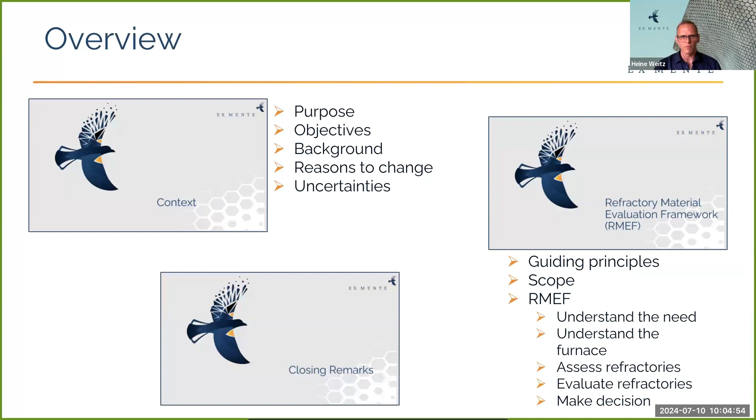And then I'll close with some key takeaways and closing remarks.

The purpose of the talk is to help support smelting operations to be profitable now and into the future. This is again a sustainability topic, with the focus here on profitability, so economic sustainability. But obviously refractory materials do have an influence on things like your thermal efficiency, so environmental sustainability is also an issue here. The focus really is to help ensure that smelting operations, when they consider new or alternative refractory materials, reduce risk as far as practically possible. We'll do that by presenting a framework for evaluating alternative refractory materials.

Just some of the objectives, what we want to achieve with this talk: we've spent quite a bit of time thinking about this, and we just want to share what we've learned so far. Even in preparing for this talk, I uncovered some new insights and thought about the sequence of how we do certain things. So it's an ongoing process, and we're still refining this. This is a platform for us to share what we've learned, and to get your feedback and your perspective. There may be some key things we are missing, and it would be wonderful to learn about that, so that as a community we can expand on this framework and all of us use it to help us be successful.

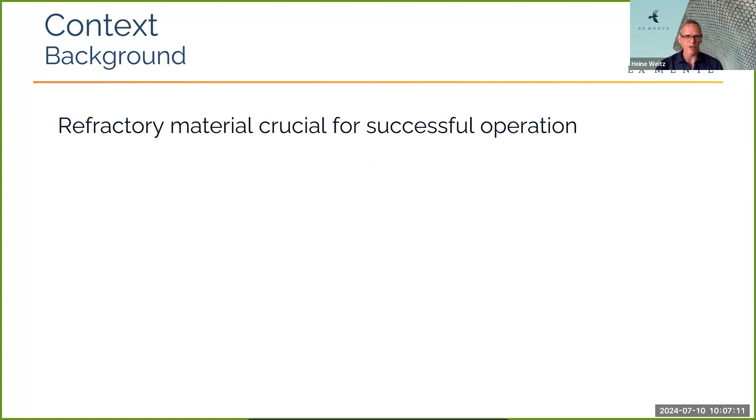Okay, just some background. I think we all know that refractory material is crucial for successful operation. I suspect no one would have joined this talk if this wasn't the case, if everyone wasn't aware of this. And we also know that the cost of failure is high.

And the first cost item that we need to consider is safety. If you have an unplanned or an unexpected failure, safety of people is of serious concern. Then also the safety of equipment and refractory cost. It's hardly ever only the refractory that fails. If you have a catastrophic failure, a lot of the surrounding equipment also gets damaged.

And then another cost item, which I suspect is actually a bigger cost item than the equipment and refractory cost, is that of lost production. Just thinking of the revenue loss if a furnace is off for 6 months, that can be quite a large amount of money, and that's a definite impact on profit.

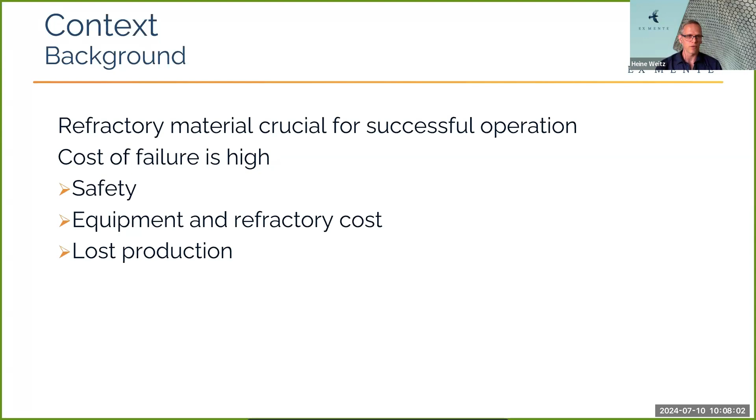So what tends to happen is people tend to stick to the familiar, keep on using the refractory material that you have been using all along. It's the lowest risk, but it does come at the expense of things like improved efficiency and refractory life. There are definitely some benefits that you can gain from looking at alternative refractories, and those opportunities are lost if you just stick to what you've always done.

But that's also not always possible. Situations change, and there are a number of things that one needs to consider. So one is sometimes forced to consider alternative refractory materials. And in the next few slides, I'm just going to talk about some of these aspects that we consider, or what drives people to change and to consider alternative refractory materials.

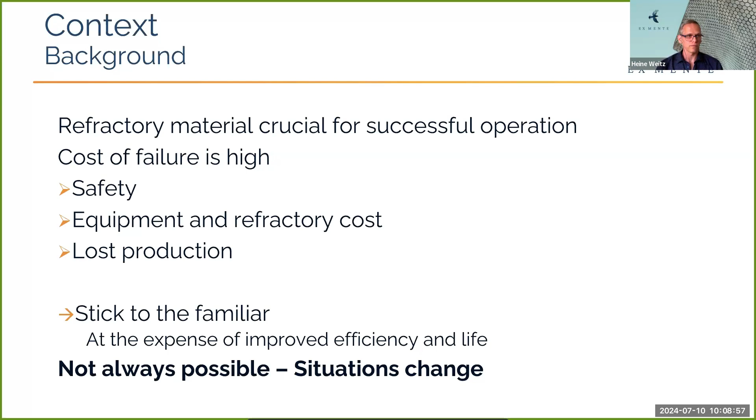Okay, so the first one I think is probably the most obvious one, lower cost. If you've got refractory lining of say 20-25 million rand, and you've got an opportunity to buy a lining for a few million rand cheaper, that's obviously a good motivation. We know that manufacturing costs in Europe are higher than in South Africa, which in turn is higher than in Asia. So manufacturing cost comes into it,

but then also the transport cost. It takes effort to get refractory materials from Asia and from Europe into South Africa, a lot more than by using a local supplier.

Second one involves reliability of supply. One seriously wants to avoid interruptions in your smelting operations. And the more popular refractory suppliers tend to have a longer pipeline of orders. So if you order a refractory material now from a prominent refractory supplier, it can take a while to get the material on site, especially if you include transport time as well.

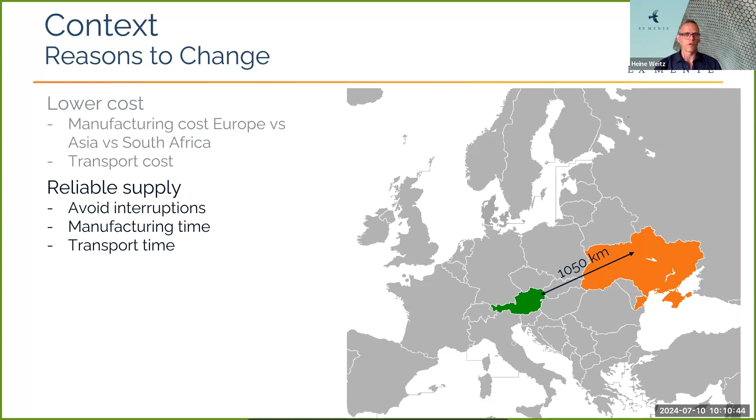And on the picture there, I think we can't ignore the fact that Austria, for example, is close to a conflict zone. That distance there is basically the distance from Bloemfontein to Cape Town. So one cannot ignore that. Don't get me wrong, I'm not trying to dissuade people from using European suppliers, but I think it is something that we need to consider, because we can't just look at the technical aspects of refractory materials. We need to think about political issues that affected it as well.

Okay, then improved refractory life. So if you have less frequent stoppages, the capital investment that you need also becomes less frequent. And similarly, the long stoppages become less frequent if your refractory life lasts longer. I think everyone would like to have at least a couple of years of longer refractory life. It just improves your utilization and your cash flow.

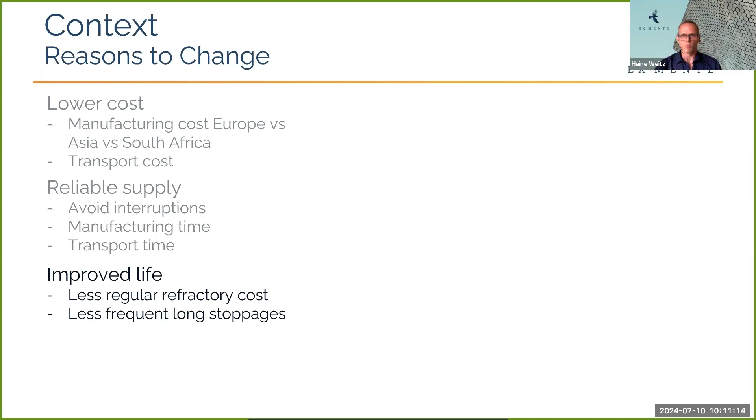And then the last one I've listed, and there are probably a lot more to think about, but these are really the ones that in our discussions with producers, these are the topics that have come up and what's driving change. So the last one is energy efficiency. If we have, for example, a 30 megawatt furnace with a utilization factor of 85%, and you are able to increase its thermal efficiency from 85 to 87%, you can save along the lines of 7 million rand per year.

But not only that, that's one perspective, the energy saving, but you can also use that energy to increase your throughput. So that might be even more depending on the commodity that you work with. So there's a big opportunity to improve your design by improving your refractory lining's thermal efficiency.

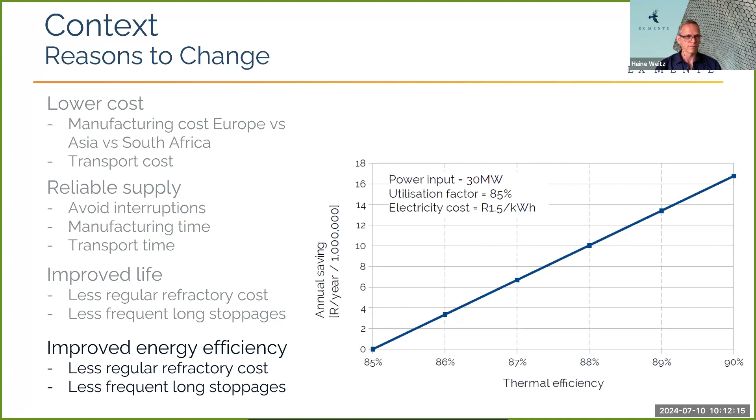Okay, but that doesn't just come for free. There are a number of uncertainties, and we've grouped them into two groupings. I'm not going to discuss each of them in detail, but it's just to make you aware of the things that we don't know when we start looking at alternative refractory materials.

So the first group is the performance uncertainties. The refractory material itself, when you heat it up and put it under the conditions it needs to be at during operation, will it be able to withstand those conditions? Then the resistance to thermostructural forces.

As the refractories expand, you have compressive forces which the refractory needs to withstand, and also things like thermal cycling. Certain refractories are more prone to spalling than others, so it's an uncertainty we need to consider. When you look at a new material, how is it going to perform in comparison with the material you've currently got?

Then compatibility between refractories and process materials. That's not always necessary, depending on your containment concept, but it's something one needs to know that you don't know at the start when you look at new refractory materials. Similarly, the ability to support the slag freeze lining.

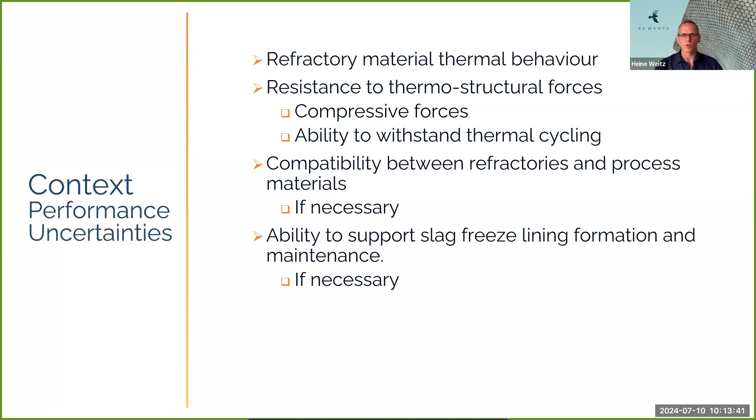So all sorts of different freeze linings. People speak about conductive and insulating freeze linings, which might be somewhat relative, but it's important to understand with the conditions that the refractory material will be exposed to and the material properties, both of the process material and the refractory materials, whether you'll be able to establish and sustain the slag freeze lining.

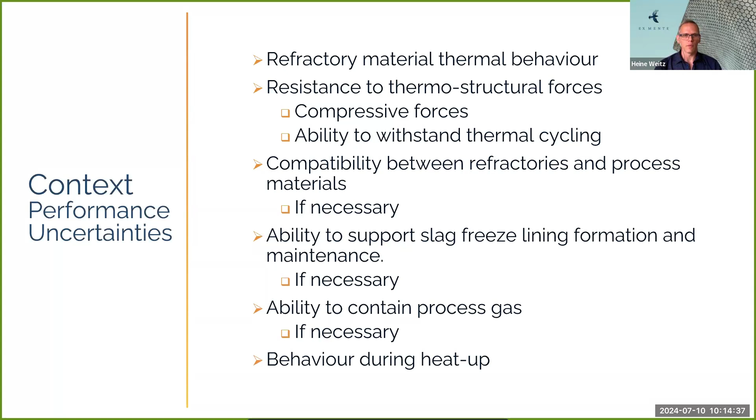And then the ability to contain process gas, especially if you're working with sulfur-bearing materials, containing sulfur dioxide gas is sometimes a requirement. And then behavior during heat up. The refractory material undergoes changes as you heat up a furnace, so it's important to understand how well it will perform during heat up and commissioning.

Now, the second group of uncertainties are the material physical properties. Here I'm not going to discuss each of them, but we've got a number of uncertainties related to the refractory material, things like thermal conductivity and resistance to thermal shock.

Slag material properties, I think that's a big topic of discussion. In the last conferences we've attended, we've noticed that people are paying attention to this, but there's a lot we still need to know regarding slag material properties, things like thermal expansion and density changes. And then feed materials as well, because the refractory materials are also in contact with solid feed material in many cases.

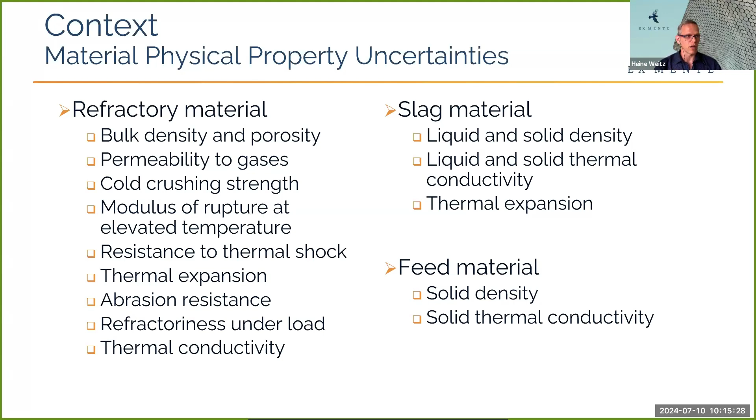Okay, so now going into the refractory material evaluation framework. Before I start, I just want to give some guiding principles. Those of you who attended the Pyrometallurgical conference earlier in the year would have seen some of these principles in Johan Zietsman's presentation, but a number of them are applicable to refractory materials as well. I'm going to step through them to make sure that we don't have unrealistic expectations of what we actually can achieve.

Okay, the first one is that perfection is a myth. You won't remove all the uncertainty. I've listed a whole number of uncertainties, and you're not going to get rid of all that uncertainty. But the idea is to remove enough uncertainty that you can proceed with confidence and know that you've done your part to make a good decision.

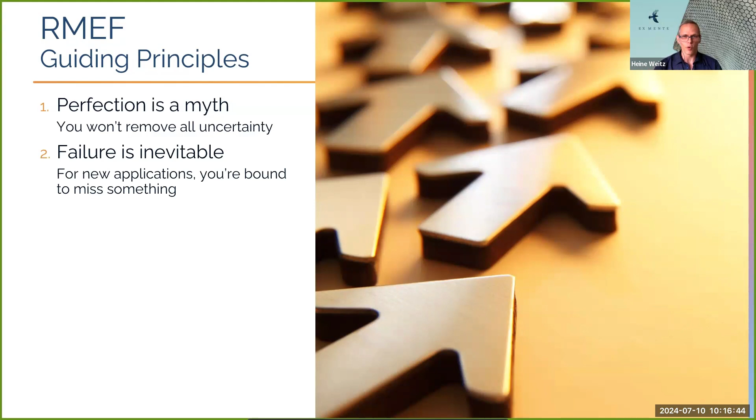Then failure is inevitable. If you're trying something new, you're bound to miss something important. But the point is to fail quickly and cheaply. We've got a whole host of tools and methods that we can use to fail quickly. We want to eliminate infeasible options as quickly as possible at the lowest cost, whether that be with a laboratory test or with a computational model. We need to make sure that we don't expend a lot of time, effort and money to investigate an option that could have been eliminated with very simple calculations.

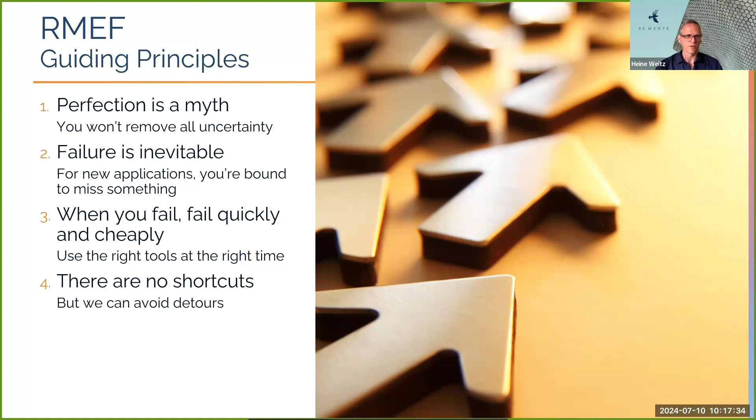Okay, then there are no shortcuts. There is a fair bit of groundwork that one needs to do when you look at alternative refractory materials. But we can avoid detours. We don't need to do a complete battery of tests on every single refractory material we consider. We can use simple tests to eliminate infeasible options quickly.

And then lastly, we need to look at the entire life cycle. So it's not just about normal operation. We need to think about commissioning, startup, heat up, and shutdowns.

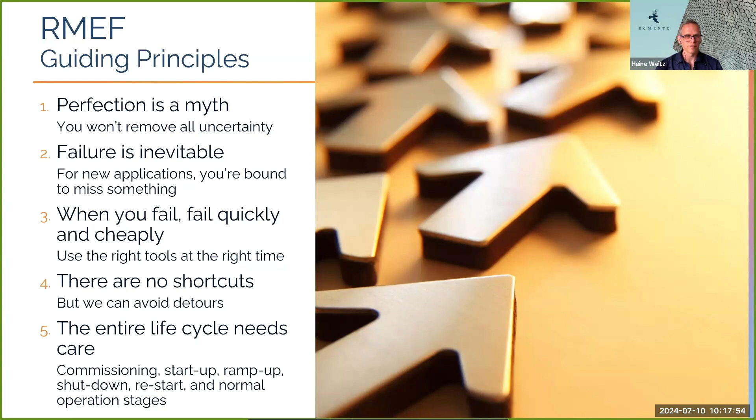Okay, so in terms of the scope of this talk, we are only looking at smelting furnaces in this case. It doesn't mean that the remainder of the talk is not applicable to other reactors, but just bear in mind that when I say something, that is my reference.

So just something to keep in mind. And we're only looking at refractory bricks. Again, a lot of what we'll address is important for things like monolithic materials, but our focus now is just on refractory bricks.

And then lastly, we're only looking at the technical aspect. At the end of the day, to make a decision on switching to a new refractory material, there are lots of commercial and other risk factors to consider. But we are only looking at the technical aspects. I think that's where a large part of the uncertainty lies. So that's really the focus of what we're talking about today.

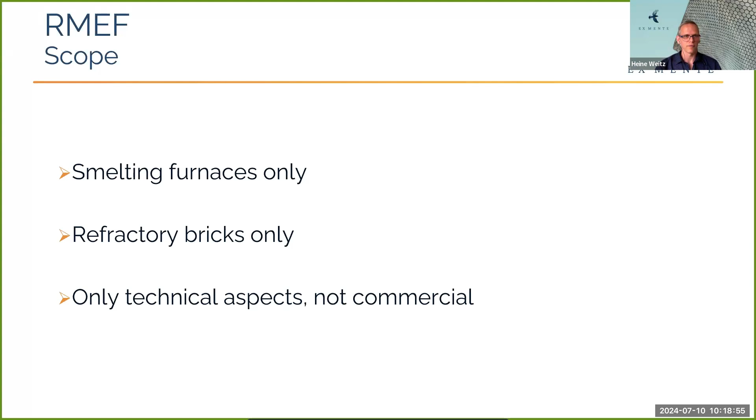Okay, so a brief overview of the refractory material evaluation framework. The idea is to start doing the high-level thinking and then gradually increase the level of detail that you consider in order to enable you to make a decision ultimately.

So we start off by understanding the need. We need to know what the requirements from the refractories are. What do you need it to do?

Then we go a bit deeper and we start looking at the furnace itself, where the refractory materials will be used, looking at the materials, the equipment, the process, and the containment strategy.

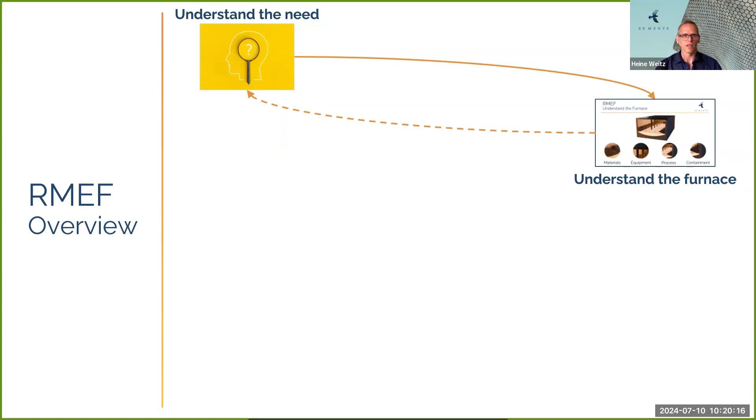Now, as you investigate the furnace, you might find that some of your initial requirements that you identified may be incorrect or unnecessary. Just thinking, for example, about if you identify a requirement for the refractory material to be compatible with your slag, but you have a process that you are able to sustain the freeze lining, then that requirement is not necessary. So one needs to review the requirements regularly and make sure that they are realistic and help guide you in your decision making.

So once you understand the furnace, you can start assessing the refractory materials. So this involves a number of physical and computational tests. So there are a number that we will address.

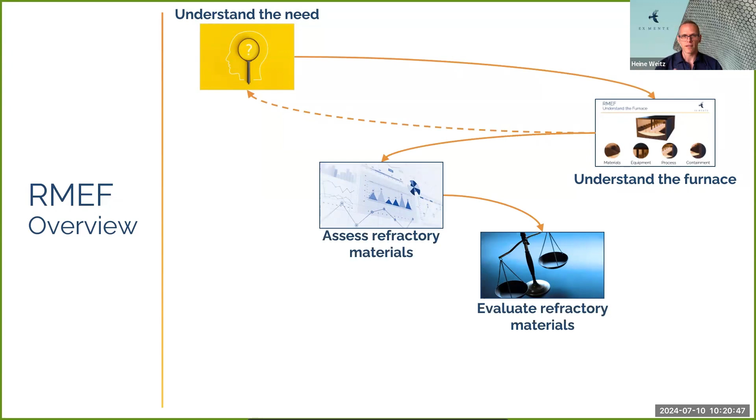And once you've done that, you can actually evaluate the refractory materials. That involves taking the assessment results and comparing that with your requirements to see, does it actually meet the requirement? And then ultimately, you can act on that. Once you've got the information, you can make a decision and approve it.

Okay, so we're going to start by looking at understanding the need for the refractory materials. To do this, we'll tap into systems engineering. We never did this in our undergraduate studies. So I'm just going to give some background information on systems engineering.

Forgive me if this is something that everyone is familiar with, but I think it's important just to say something about systems engineering. Now, the systems engineering body of knowledge describes it as an interdisciplinary approach and means to enable the realization of successful systems. So that's quite a mouthful. But it's an approach followed by a number of big companies like Boeing, Google, NASA, and the like. And really, it's a means of helping us to deal with complexity.

Now, this is a fairly rich field. I think the body of knowledge is a document of about 3,300 pages with lots of interesting methods and techniques. And we don't have to go into the detail of all of that. The systems we work with are complex, but we're not designing an aircraft. So we only need to use those tools that really help us.

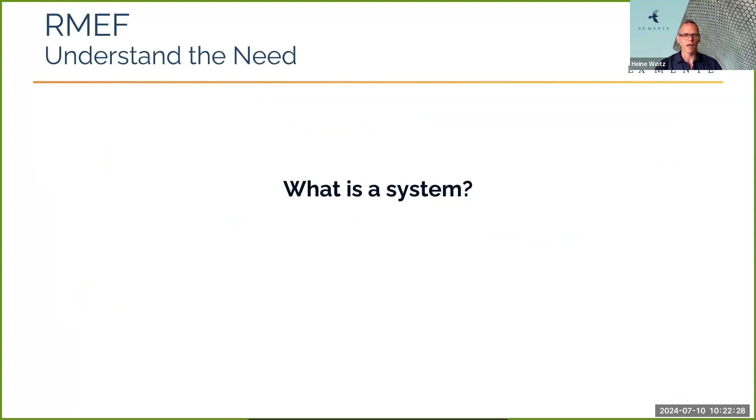Okay, so let's just step back and think, okay, what is a system? Now, the definition of a system is a set of interrelated components or elements that work together to achieve a common goal or purpose. So it's basically something that can do something on its own, to put it simply.

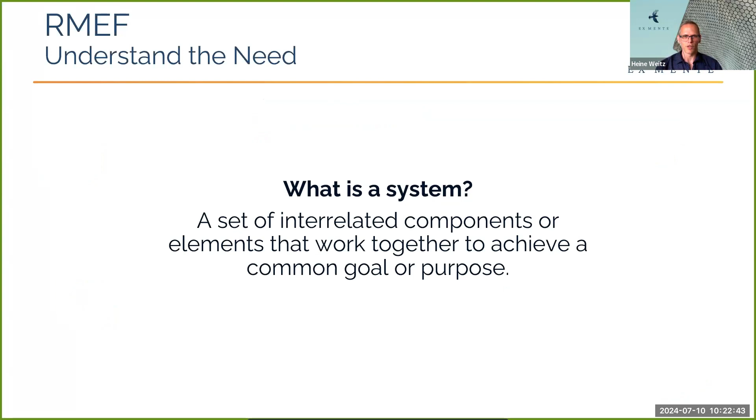Okay, so the two tools from systems engineering that we rely on, the first one is the physical hierarchy. So that's identifying all the system elements and seeing how they fit together, how they support one another. And this is really a means of identifying all the moving parts in your system to make sure that you don't miss anything important.

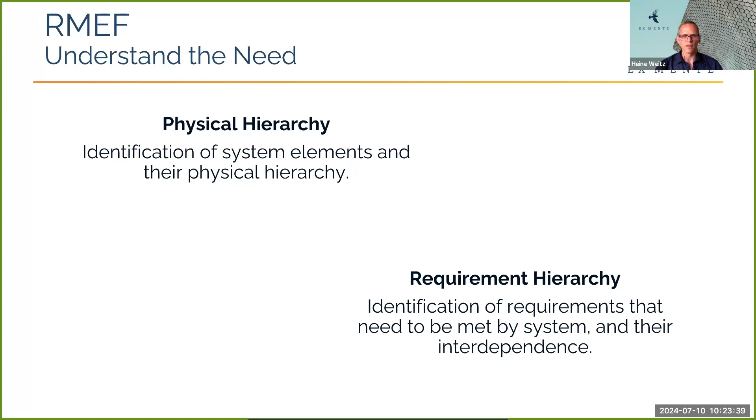And the second tool is the requirement hierarchy, or maybe call it a functional hierarchy. So each component in your system or each system element has certain requirements associated with it. And these requirements also form a hierarchy with certain parent and child connections. So that's the idea with the requirement analysis, is to identify that requirement hierarchy to make sure that we address each of those requirements.

Okay, so we'll start looking at the physical hierarchy. So what we do with this is to take a furnace, for example, and break it down into all its individual system elements. Then we can start thinking about each element individually and make sure to systematically step through that and that we don't miss anything important, or at least limit the likelihood of missing something important.

So we'll start from the highest level, which is a system of systems. And we can consider a smelter site to be a system of systems. It contains a number of systems, such as the smelting furnace, but also others like a rotary kiln and a batching plant. And a laboratory is also considered to be a system. I'm going to expand now on the smelting furnace only, because that's where the refractory materials are located. So I'm going to unpack this gradually.

So each system can be made up of a number of subsystems. So for a smelting furnace, that could be the furnace vessel, but also the feed system, electrical system, electrodes. And there are a number of subsystems that make up the smelting furnace. Okay, the level below that we refer to as assemblies. So a furnace vessel, we have different assemblies. So the hearth, the tapholes, the different levels on the sidewall, and freeboard and the roof, they are all

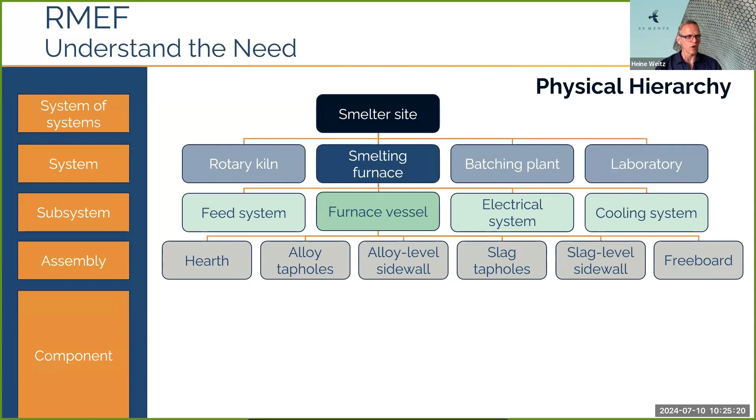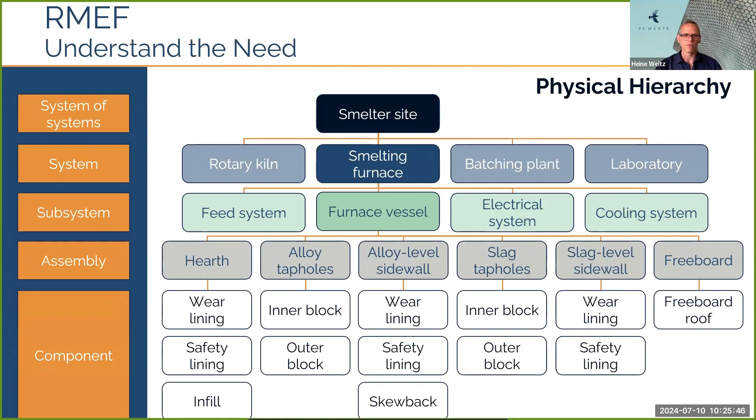considered to be assemblies. And then at the lowest level, we've got our components. So each assembly is again made up of a number of components. Just looking at the hearth, we've got a wear lining and a safety lining and infill material. So the idea with the physical hierarchy is to step through the equipment that is physically present on site and identify each different part so that we can think about them on their own.

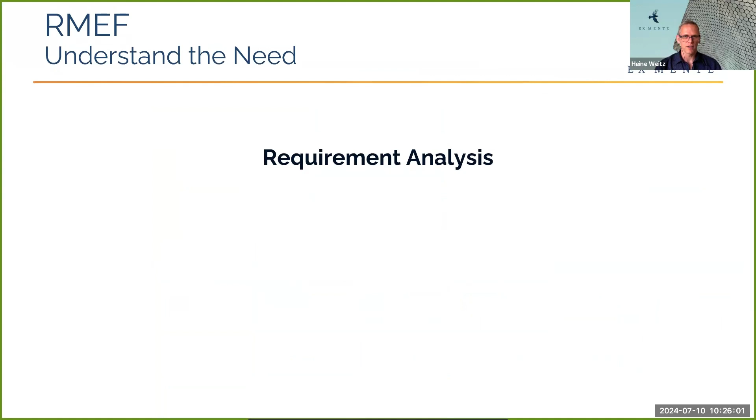Okay, so next we're moving to the second tool from systems engineering that we use, which is requirement analysis or the requirement hierarchy. And again, it's to start with the high-level thinking. I think this is something that's fairly simple to do, a requirement analysis. And I think because it's so simple, people tend not to do it. It doesn't feel like hard work. As engineers, we tend to dive into the how before we properly think about the why and what. So this is just a reminder, an encouragement to rather look at requirements before starting with detailed calculations and modeling.

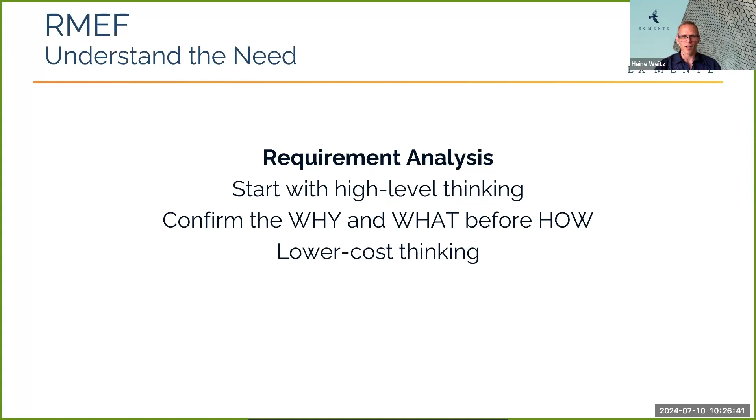This is very low cost thinking, so it doesn't involve lots of modeling time and analysis. It's really a very simple means of identifying what the system needs to do. And again, it's to help us make sense of complex systems. And the format we typically do this in is just a work session, just sitting around the table and having the team think about what is required of each system element and the system as a whole, to make sure that we set realistic requirements that we can use to evaluate the refractory material in this case.

Okay, so requirements are classified in a number of ways. I'll just show three common ones that we use. Now, classifying your requirements is not necessarily an objective, but we do like to think about the different types of requirements because that guides you into identifying them. So the first one we think about are the functional requirements. And the leading question there is, what must it do? So what must this system element do? Or what must the system do? This would be something like the furnace needs to produce X tons of ferrochrome a year.

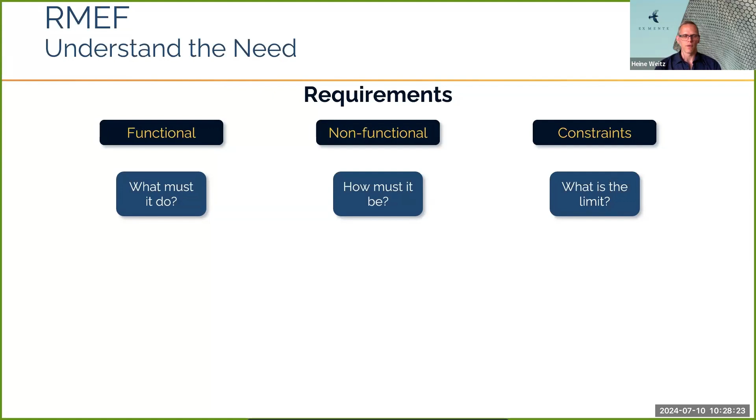The second set of requirements are the non-functional requirements. So how must it be? So the furnace must be efficient, or it must be maintainable. And the last one is the constraints. So what is the limit? What can you not do with this system element? Or yes, what are you prevented from doing with the system element?

Now we use four statements to think about requirements or to describe our requirements. The first one is obviously the requirement statement itself. So what is the requirement? The second one is the rationale statement. Why is this a requirement? One tends to identify requirements without always thinking about why you need it. And then we've got the performance statement. So what is it that you're going to target? And here it's important to actually quantify your performance statement as far as possible.

If you're not able to quantify your performance statement, it can be an indication that it is not actually a necessary requirement. So it's important to think about how will I quantify it, because if you can't quantify it, there's no way of checking if you actually meet the requirement. And the last one is the verification statement. How will you measure your performance?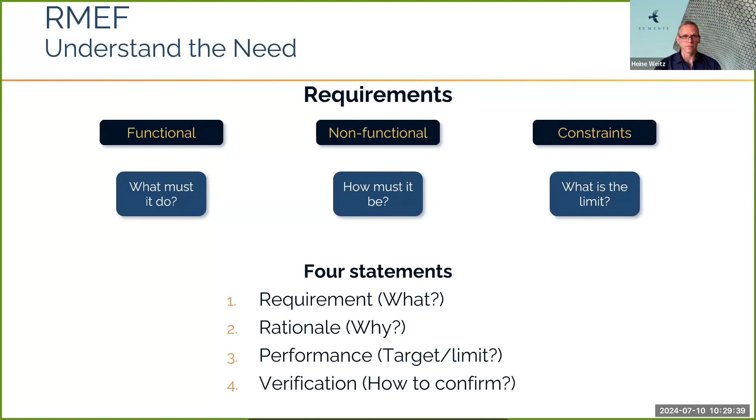Now, just a couple of examples here. So you can see right at the top line says that's the requirement statement. So in this case, thermal losses from the hearth must be kept low. And the rationale for having this requirement is that losses reduce efficiency and ultimately production.

You'll notice here that the performance statement, I haven't actually put a number next to it. The reason for that is that at this point, we weren't able to quantify this value. This doesn't mean that you should throw away the requirement immediately, but it does serve as a placeholder. But eventually, before you make a decision on switching to a new refractory material, your performance statements need to be quantified.

Right at the bottom, we have a simple diagram. If we string all the requirements together, linking all the parent requirements to the children requirements, we end up with quite a massive diagram. So when we document our requirements, we tend to limit each requirement just to its direct parents

and its direct children. So in this case, for instance, the requirement with the dark border, limiting hearth thermal losses, that is a child requirement of the requirement to be efficient. So it just helps us to think about where the requirement fits into the whole requirement hierarchy.

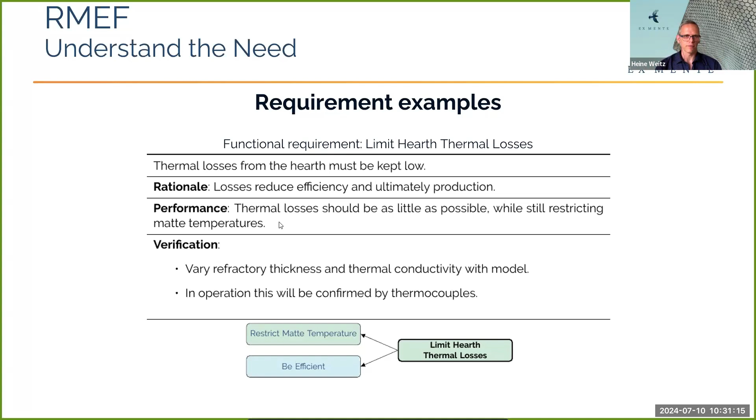Okay, so now we've gone through understanding the needs. The next one we'll look at is understanding the furnace. And there are 4 parts that we look at, or focus areas, when we try to understand the furnace. First one is the materials. There are a number of materials in a furnace, from raw materials to product materials and everything in between. And there are a number of process materials that can also be present. And it's important to identify them and understand them because they do have an effect on your refractory materials.

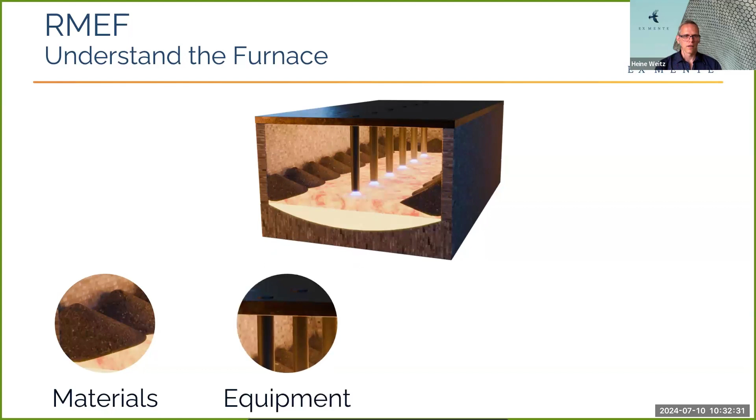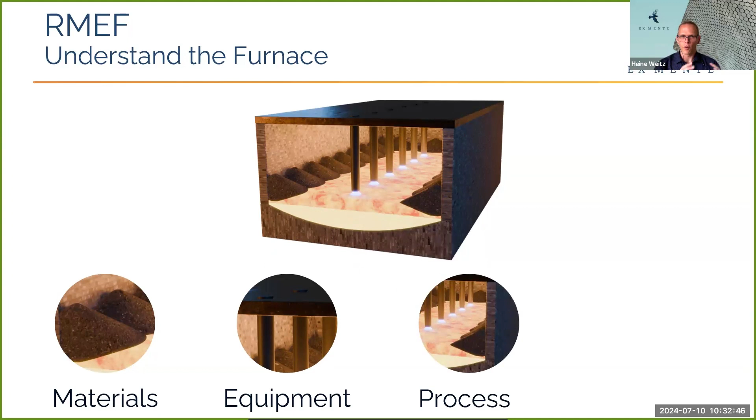Second one is the equipment itself, the equipment that you have available, and what you can and cannot do with your equipment affects your refractory materials. Then we look at the process, how you get from your feed materials to your products. And the last one is the containment concept, which is quite important to be aware of when you think about your refractory material.

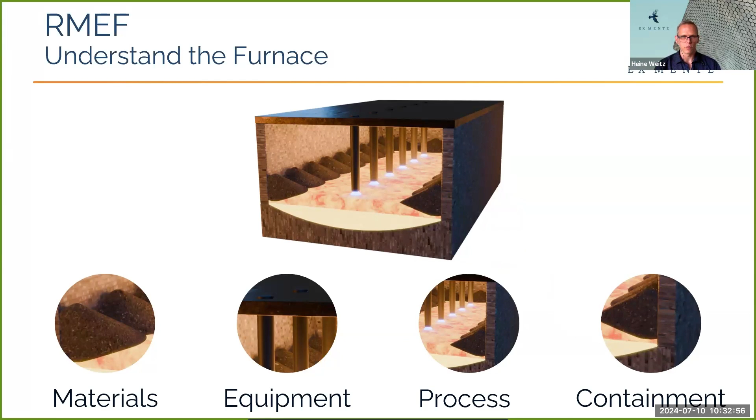Okay, starting with the materials, we look at the raw materials, where they come from, what compositions they have, the typical compositions, and how variable they are. That is important to know because your refractory materials will be exposed to these materials. So understanding the ranges within which it can vary is quite important. And something we also look at is the phase behavior.

Something like thermochemical calculations is quite a useful way of looking at raw materials. Simply taking the raw material assays and studying how the phase behavior changes as a function of temperature can give us wonderful insight to show us what material your refractory material will be in contact with.

And similarly, we do the same things for the products, looking at the typical composition and the variability within the products and how those products change as a function of temperature. One tends to sometimes think about the product materials at the temperature where they are tapped, but the temperature in the center of the furnace is different from the temperature right next to your refractory material. So the composition of the product materials will be different at that point.

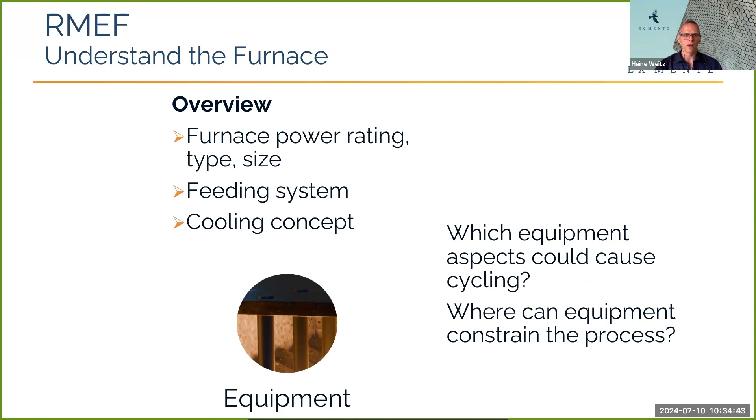Okay, then looking at the equipment, the idea here is not to go into detailed design, but rather to identify those aspects that will have an influence on your refractory material. So how could your equipment cause things like cycling? If you think about the Soderberg electrodes, that's essentially a process within a process that places certain constraints on your operation, and that might cause you to run into issues with cycling of your refractory materials if you've got electrode breaks. So those are really the aspects that we are looking at, to try and figure out how your equipment will affect your process.

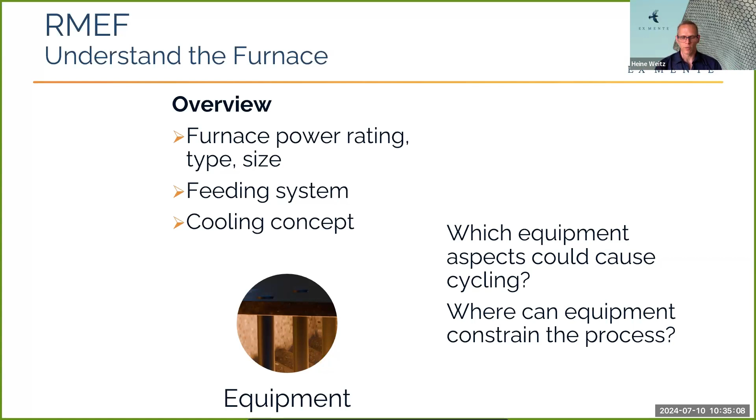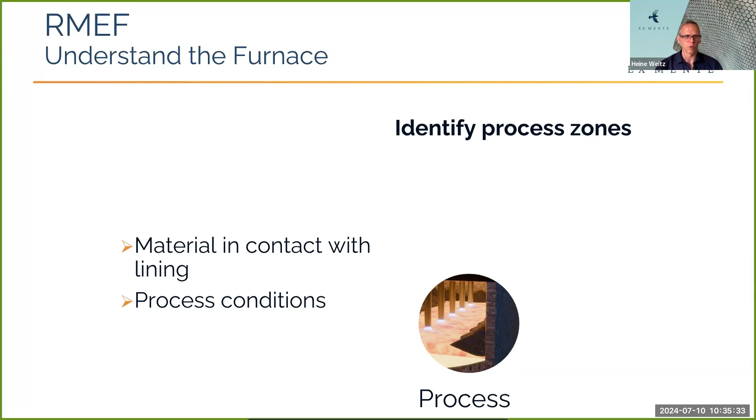Okay, so when we look at the process itself, it's important to identify the different process zones and see what material is in contact with your refractory material at different points in the furnace. You've got different process conditions at different positions in the furnace. So it's important to understand what the local conditions are that your refractory material will be exposed to. And to a large extent, that is in comparison to your existing lining material. So it's important to understand how a new material would perform in relation to what you've currently got.

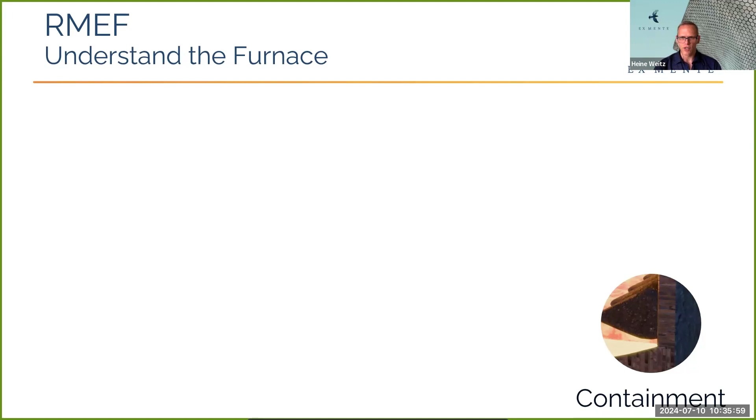Okay. Then the last component of understanding the furnace is containment. Now there are three containment strategies that at least we are aware of. The first one is that of sidewall feed heaps. By feeding large amounts of material close to the sidewall, it serves as a heat sink, and that helps to limit contact between very high temperature slag or matte and your refractory material.

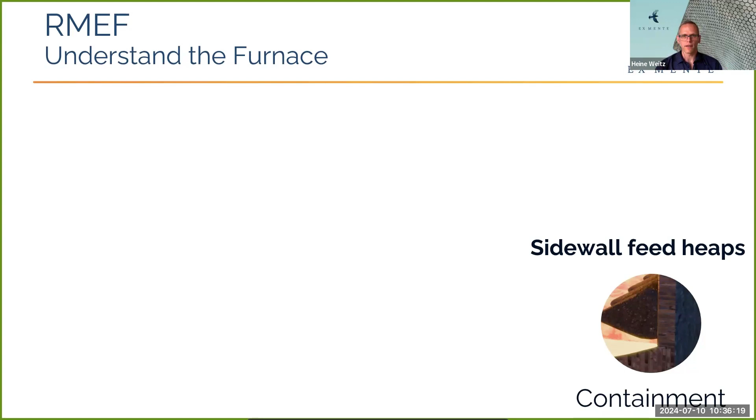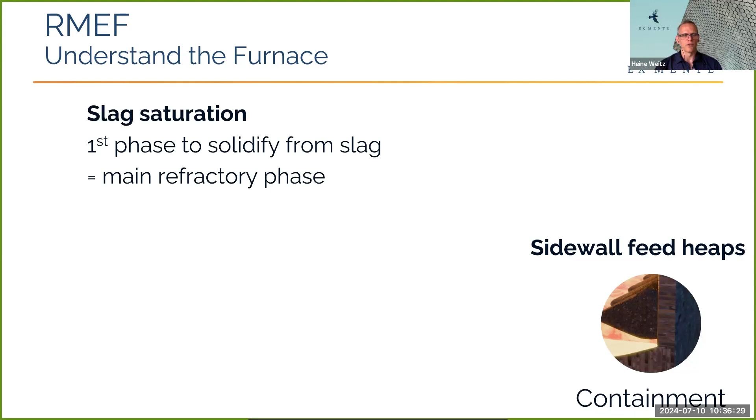Okay. The second containment concept is that of slag saturation. So the idea here is to make sure or to see if your slag is saturated in the primary phase of your refractory material. This is practically what that means. We would take a slag composition and perform thermochemistry calculations, equilibrium calculations on that over a range of temperatures. And we look at the first phase to precipitate upon cooling.

If, for example, your first phase to precipitate is periclase and you've got a magnesia-based refractory, the likelihood of that refractory material dissolving into the slag is much lower than if you have, for example, an alumina-based refractory material. So that is one strategy to contain the process.

Okay, then the last one is to have a slag freeze lining. So by carefully controlling your mass and energy balance, you may be able to form and to sustain a freeze lining that forms a barrier between your refractory material and your slag. So that negates the need to have a compatible slag and refractory material to a large extent.

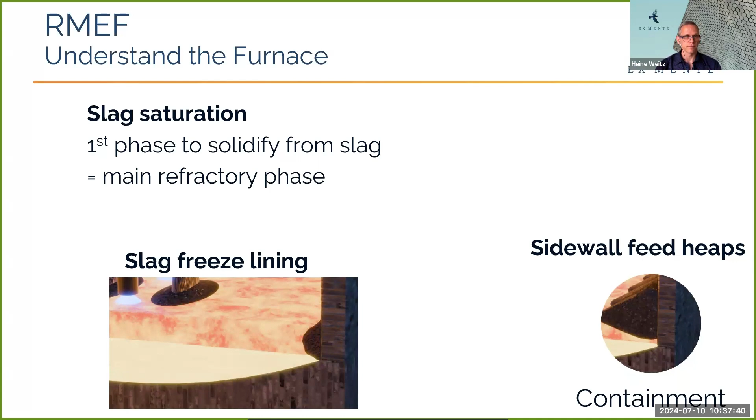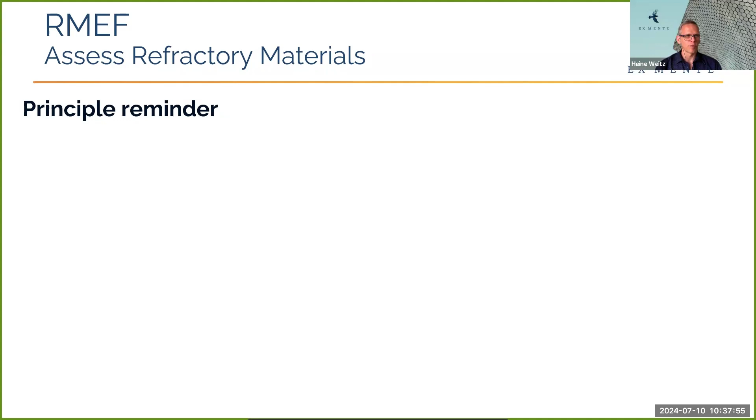Okay, so now we're going to go into the assessment of the refractory materials. There are a number of tests that we'll go into. But before I do that, I just want to remind you again of the principle, and that is to fail cheaply and quickly. So the idea with these tests is to start with the lowest possible cost test and to eliminate infeasible material options as quickly as possible.

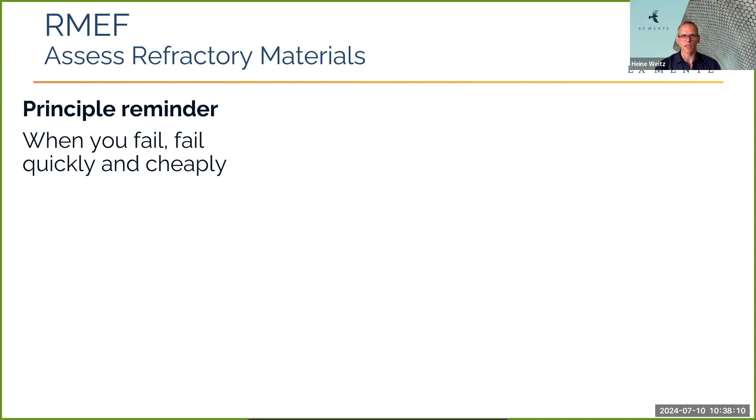Okay, so we start. The first step that we do in assessing refractory materials is to simply evaluate the supplier information. So the suppliers provide certain pieces of information with the refractory materials, and just based on that, one can often, on a qualitative basis, eliminate certain refractory materials as options. Secondly, we prepare assays for the refractory materials, and that allows us to study refractory thermal behavior. Then we need to prepare product assays. We need to understand what the products are inside the furnace.

And once we have that, we can start looking at refractory product interaction to study slag refractory compatibility, or slag freeze lining formation. That obviously depends on your containment concept. So one wouldn't look at those two aspects if you're using the other containment concept.

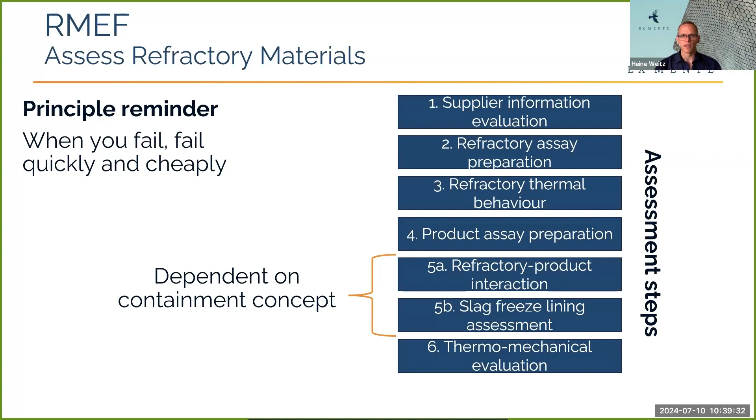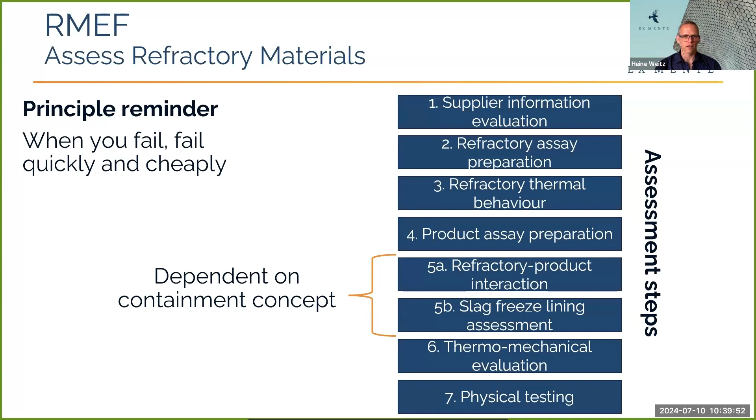The next step is then to go into thermomechanical evaluation, looking at the stresses in refractory materials and the ability of the refractory materials to withstand those stresses. And then the final one is physical testing. So that is physically recreating the conditions that the refractory material will be exposed to in operation, and evaluating the performance during those tests.

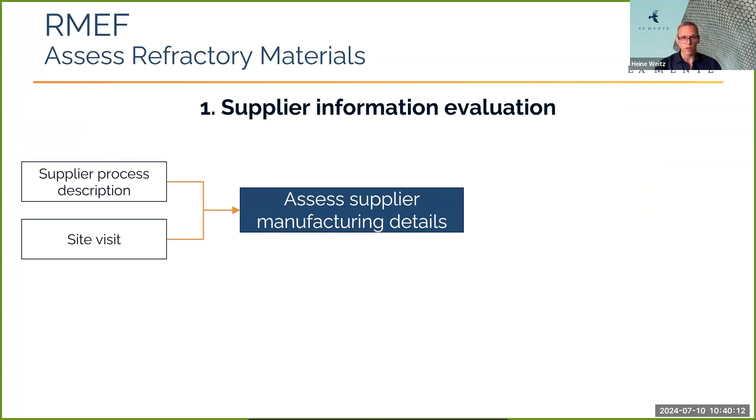Okay, so when we look at the supplier information evaluation, there are two pieces of information that we can look at to assess the supplier's manufacturing details. So you can use, for example, a process description from the supplier. Now, I realize this information may not always be available, but in a perfect world, if we do have this information available, that is an important input that you can use.

And also just simply visiting the supplier's site, seeing what they have available, how they do things, how they handle their materials, how they store it. And that ultimately gives you an appreciation for the factors that affect quality. Just visually inspecting what the supplier has and what they do on their site.

Okay, then we also need to look at the testing details. So when you receive refractory materials, you get a data sheet with test results. The question is always how reliable are those test results? So again, one can look at the test descriptions, if that's available, look at the quality standards that are being used, and also how those test results compare to comparative tests that were done, either by the refractory supplier or by doing it yourself. And again, that gives you confidence or identifies shortcomings in the test results.

So to a large extent, this is a qualitative assessment. So it's a fairly low-cost assessment, no detailed calculations that you need to perform, but it is a way of quickly identifying if a supplier will be able to provide you with refractory material that is of high quality.

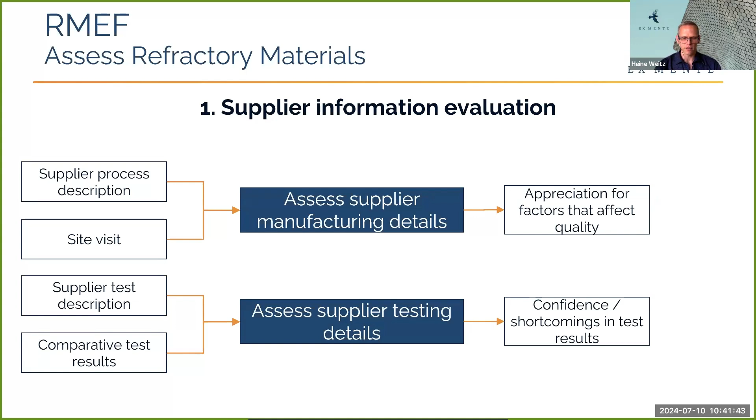Okay, then we need to go into refractory assay preparation. We start off with a refractory material chemical assay and also a mineralogical assay. Both of these are important. Typically, you only get a chemical assay from the refractory suppliers, but it's easy enough to do a mineralogical assay. Based on that, you can do an assay reconciliation to make sure that your chemical and mineralogical assay are actually in agreement, which helps you prepare the reconciled refractory assay that you will use in the next step.

One also needs to look at the refractory material microstructure, using a technique like SEM-EDS to identify what the different minerals are in your refractory material. It's not enough for the bulk material to perform well, but the individual phases also need to perform well. For example, if your matrix that holds your refractory grains together melts at low temperature, the refractory is not going to last.

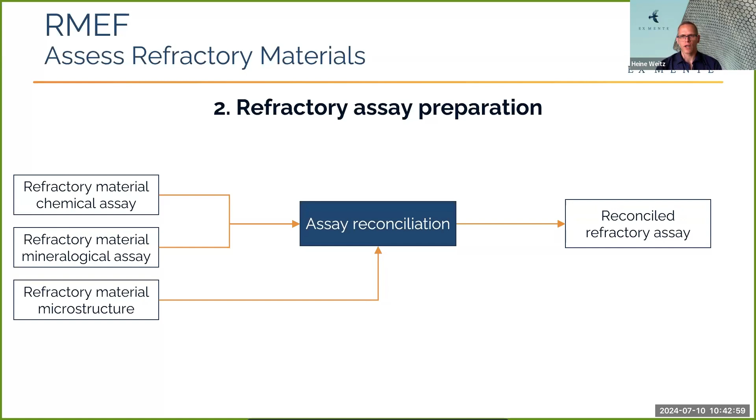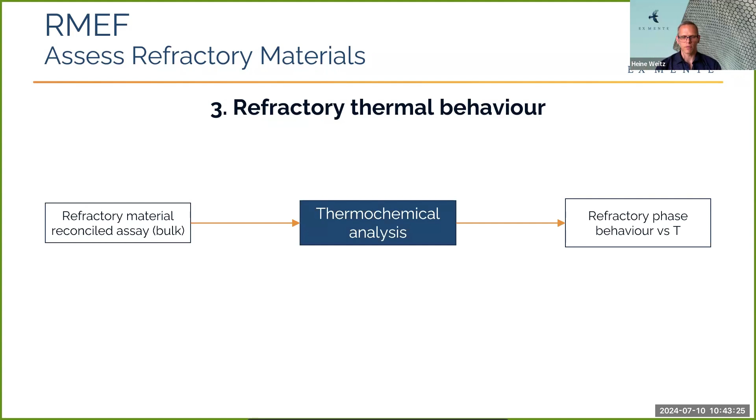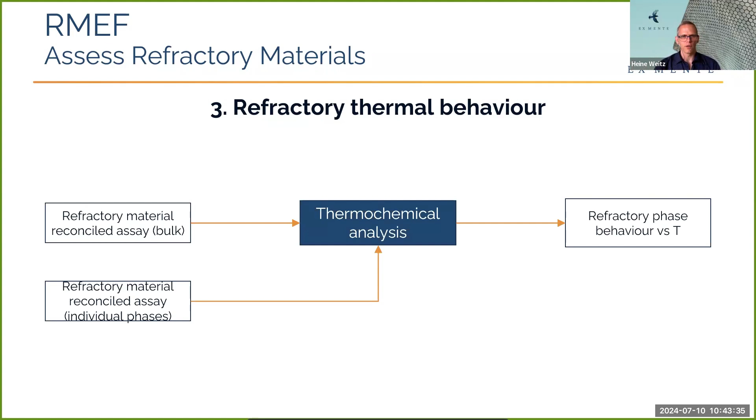So then we look at the refractory material on its own, how it behaves as a function of temperature. We start off with the refractory material reconciled assay shown on the previous slide, and on that we can perform a thermochemical analysis and simply look at how the refractory material behaves as a function of temperature - at what point will it start to melt. Again, we also need to look at the individual phases to make sure we don't have a phase in the refractory material that would melt prematurely.

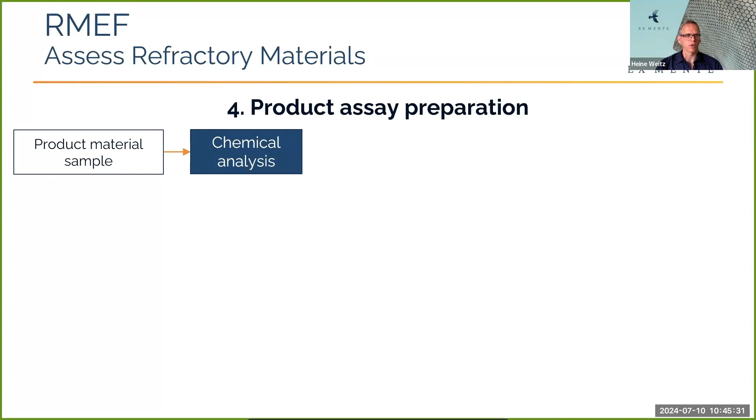I see we are running a bit short of time, so I'm going to go through the next slides fairly quickly. We then need to look at preparing product assays so we can look at how they will interact with the refractory materials. Again, we start off with a sample, do a chemical analysis, and end up with a product material assay.

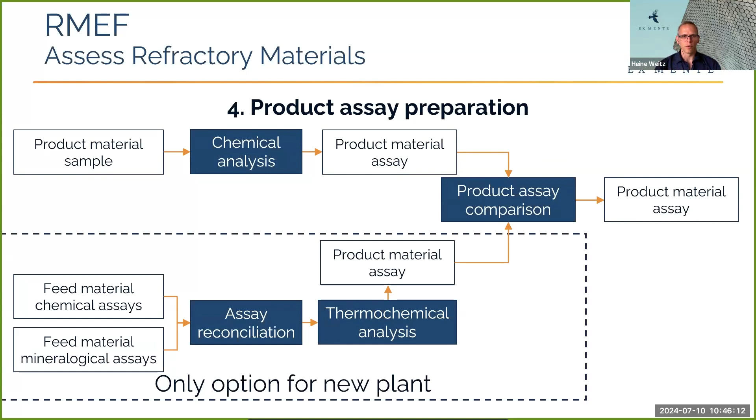Another approach is to take your feed materials, create a reconciled assay, and perform a thermochemical analysis to estimate what your product composition would be, then compare that with the actual products you get from site samples. This last approach is really the only one - if you have a new plant, this is the only approach you can follow to determine what your product material assay is, because you physically don't have product samples available.

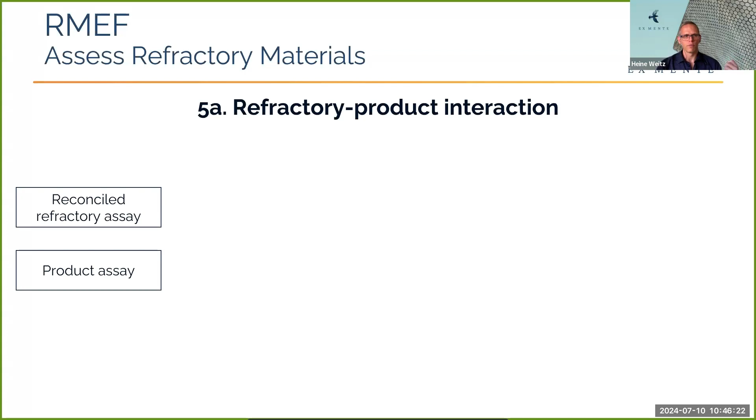Then if we look at refractory-product interaction, if we've got the product materials and we know what the refractory materials look like, we can put them in contact with one another, and with thermochemistry calculations we can look at how they are expected to interact. Now, this is not a simple matter because we're not sure how much slag would be in contact with a certain mass of refractory material.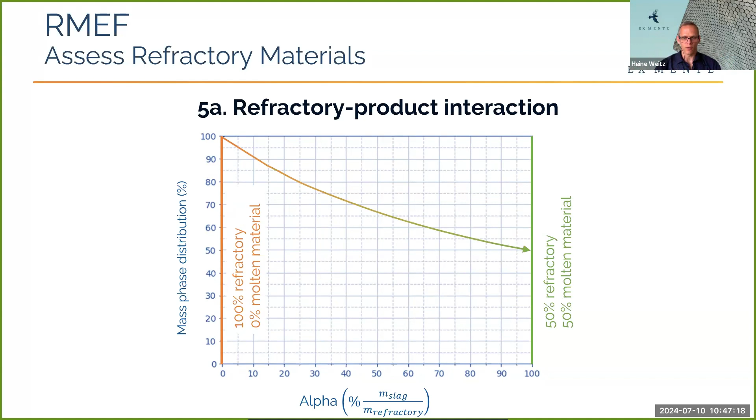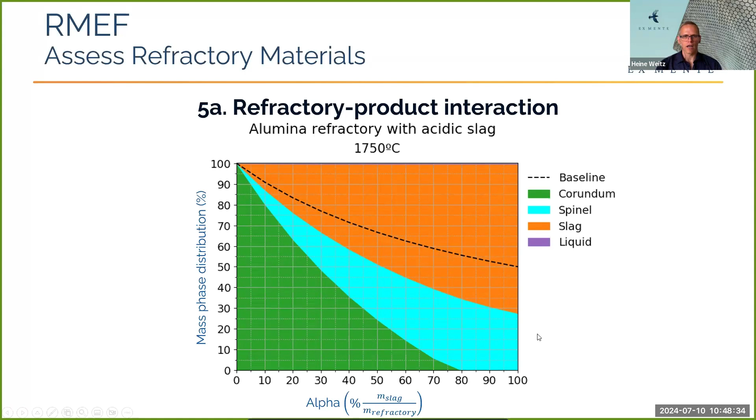Okay, then for slag freeze lining assessment, we can take a slag assay, perform a thermochemical analysis on it to understand how the slag changes as a function of temperature. And then with a simple 1D multiphysics model, we can estimate what the likelihood is of a slag freeze lining forming, and then understand what the stresses and strains are in the refractory material.

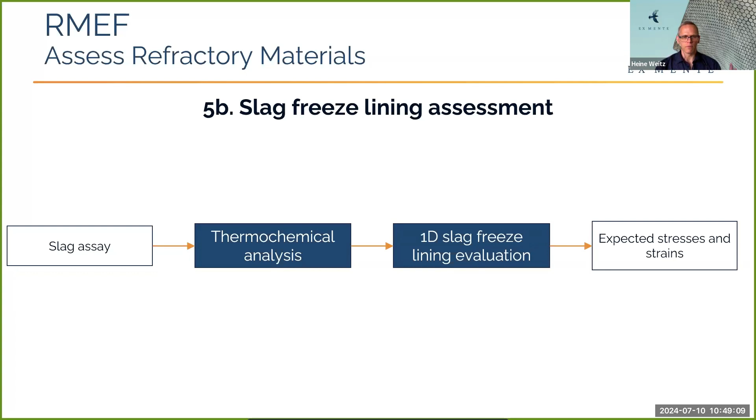Now, for the thermomechanical evaluation, again, we can take the information that we have available at the start, the refractory material physical properties that we get from the supplier, slag physical properties and alloy matte physical properties from literature, and then create a multiphysics model to describe the process.

But then you can also substantiate that by doing material property testing, taking the refractory materials and the product material samples and actually identifying or narrowing down the range of material properties to feed that into the multiphysics model again, to allow us to understand the expected stresses and strains and also the heat losses.

So with a preliminary evaluation, you look at a wide range because you've got lots of uncertainty in your material properties at the start, and identify those properties that need more attention, where you need to get more certainty and narrow the ranges to look at.

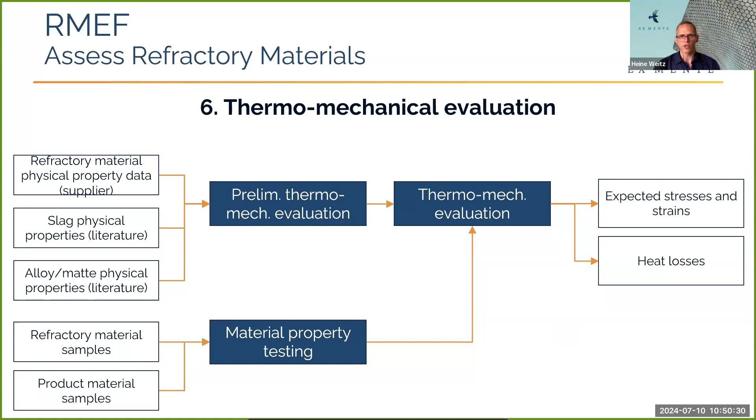And then you do material property testing only on those aspects that have a large influence on the modeling results.

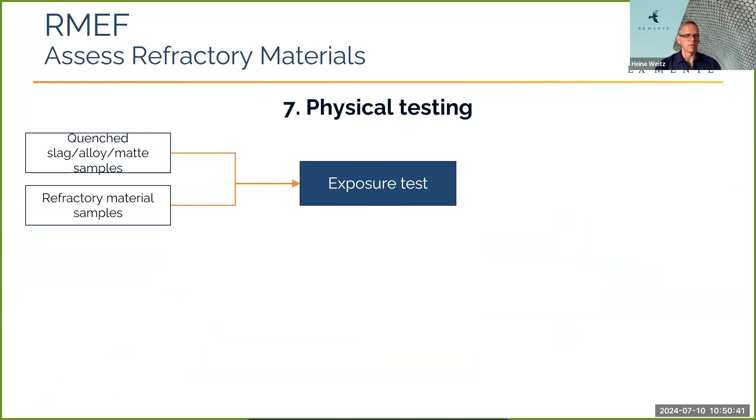Okay, and then finally, we can go to physical testing, where we take a product sample in contact with a refractory material at the conditions that you expect in the process and do an exposure test. And similarly, you can do an abrasion test, which involves higher flow velocities, and one can also do gas porosity tests, again, if that is a requirement that gas containment is required in the freeboard.

And at the end of the day, the absolute numbers are maybe less telling than the number compared to that of the existing material. So it's important to be able to look at the performance of an existing refractory material and compare that with a new material to see if the new material would outperform or underperform.

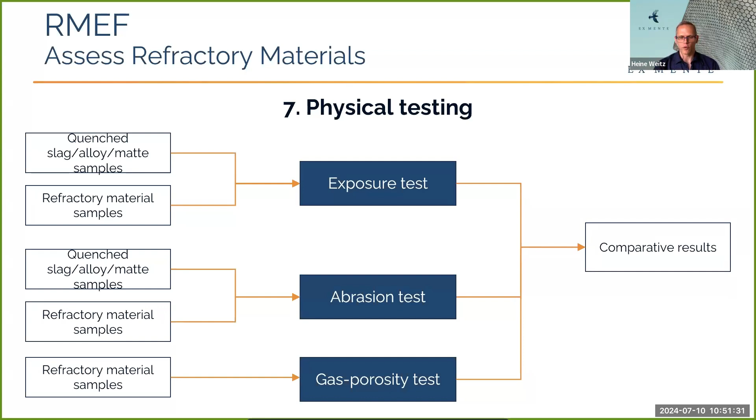Okay, we can then go into the evaluation of the refractory material. So now we will take these assessments and compare them, the results, with the requirements that we identified initially. So I've got a bit of a flow chart here.

Well, actually, firstly, before I get to the flow chart, we would look at the requirements. In this case, we would look at the requirement that the refractory material solidus temperature for the new material needs to be greater than that of the existing material. So with thermochemical calculations, we can identify what the solidus temperature is and compare that with the original refractory material.

Similarly, we can look at the heat losses. When we do a thermomechanical model, how does the heat losses compare between the old and the new refractory materials? And how does it meet the requirements?

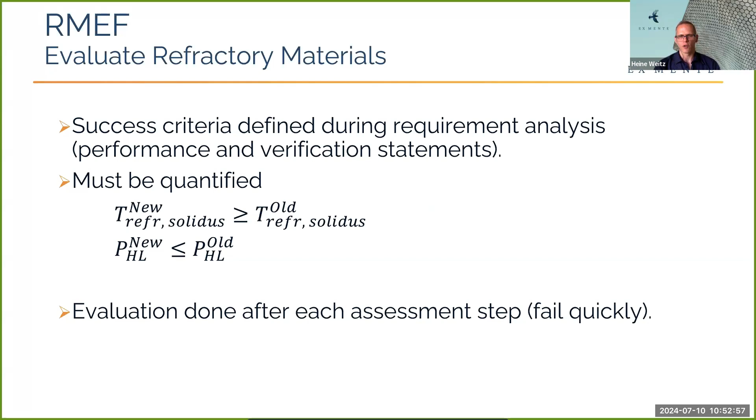And again, so we need to do the evaluation after each assessment step. So we don't do the whole battery of assessment tests before we start looking at evaluation. After each test we do, we need to evaluate it against the requirements so that we can eliminate infeasible options as quickly as possible.

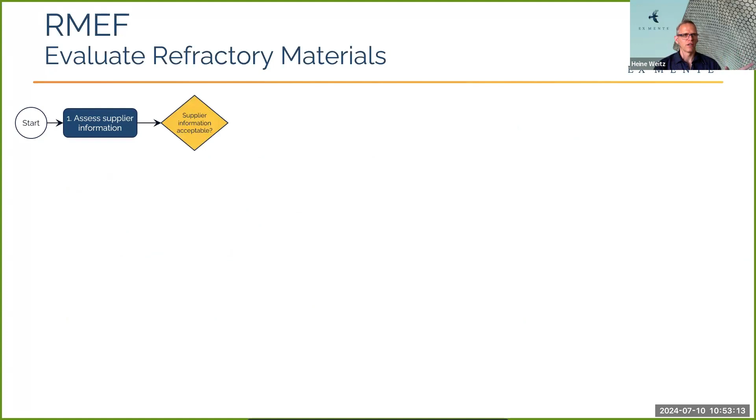Okay, so this is just a quick flow chart just to show how we step through the assessment and evaluation. So we take supplier information and evaluate that. Is the information acceptable? Does it meet all the quality standards and is all the information provided? If it's not, you can abort. And abort here doesn't mean necessarily that you completely throw out this new refractory material, but rather that you reassess and see if there's something that you've missed or another angle that you need to look at.

Okay, if the supplier information is good, you can go to refractory assay preparation, do a thermal behavior assessment, and then if again you're at a point here where you need to do an evaluation, see if the refractory material is stable at the process temperature. If it's not, again you abort, but otherwise you can go on and look at the containment strategy.

Do you require the material, the refractory and the product to be compatible? If not, do you require a freeze lining to be formed? And then you can do the appropriate test depending on what containment strategy you have. But before you can look at those assessments, you need to determine what your product assay is.

And then ultimately, evaluate performance. If you require a freeze lining, is there a likelihood of a freeze lining forming? If not, the test fails. If it is, you go on to the next step by doing a more detailed thermomechanical model and evaluating the performance. If the thermomechanical model is unsuccessful, you stop. If it's successful, you proceed to physical testing. And if physical testing is successful, you can make a decision whether or not to proceed with this refractory material.

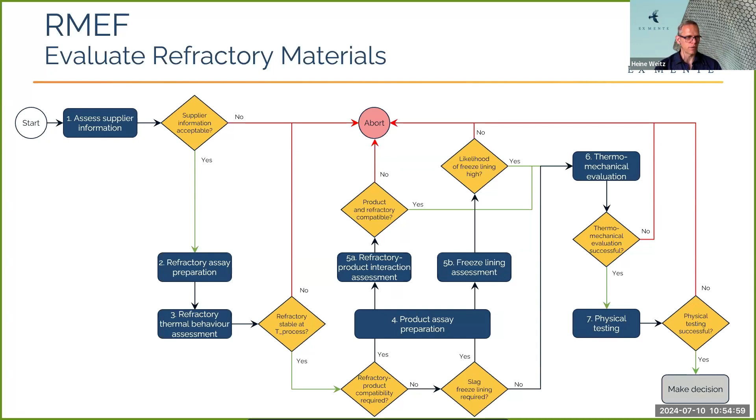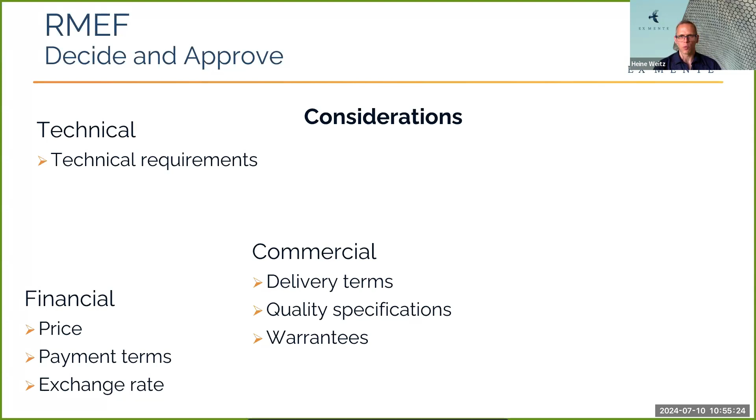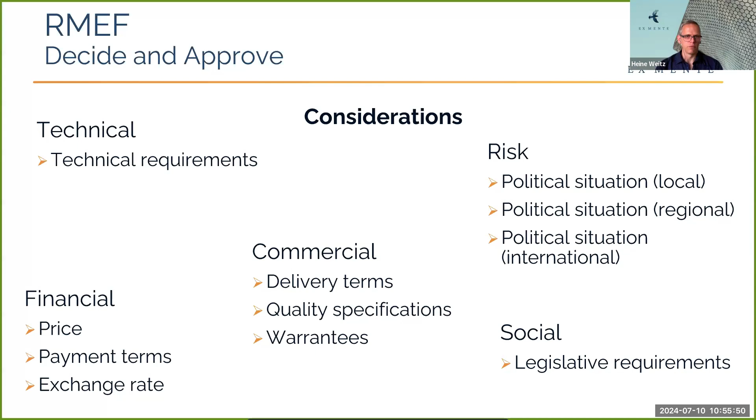When we make a decision on refractories, we not only need to think about the technical aspects, which is what we addressed in this talk, but we also need to look at the financial aspects: price, payment terms, exchange rates, and commercial aspects like how long it will take to get the material, what are the quality specifications and warranties, and what risks you have. Local, regional, and international political issues may all be considerations when buying refractory material. And then we've also got social or legislative requirements, like broad-based Black economic empowerment. That is sometimes a requirement to procure a certain percentage of your materials locally. So those are all things one needs to consider to make a decision.

Okay, so just some closing remarks. There are a number of tools available for assessing refractory materials, but the answer is not in any one of those tools or in all of them, but in using the appropriate tools at the appropriate time. And again, we won't get a perfect answer, but the aim is to allow us to reduce uncertainty enough so that we can proceed with confidence.

We've been working on this for several years, but we're still gaining more insight, and we're not happy that we've arrived yet with a perfect answer. But this does give us a lot of tools to think about and reason about the process, the refractory materials, and the interaction between the materials.

So the idea with the framework is to help us methodically step through different tests and evaluate the performance of the refractory materials. One needs to establish good relationships with service providers. There needs to be open communication so that it just helps you to make good decisions ultimately and gain confidence in what they can provide you.

And we've got certain parts that we can do, but in certain instances, other suppliers are in a better position to assist. But wherever we can help, we'd be happy to have discussions with people and point you in the right direction, whatever we can do to help promote discussion and help the industry make good decisions. We'd be happy to help.

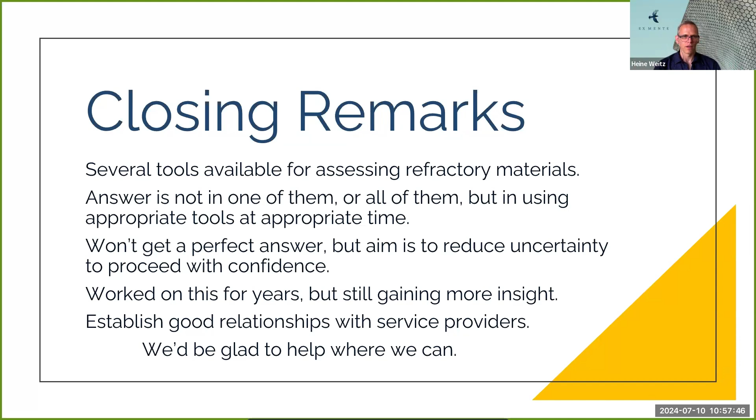Okay, sorry, the last few slides were quite rushed as I realized we were running out of time, but I hope this has given you a good overview of the framework and how we can use it to think about new refractory materials.